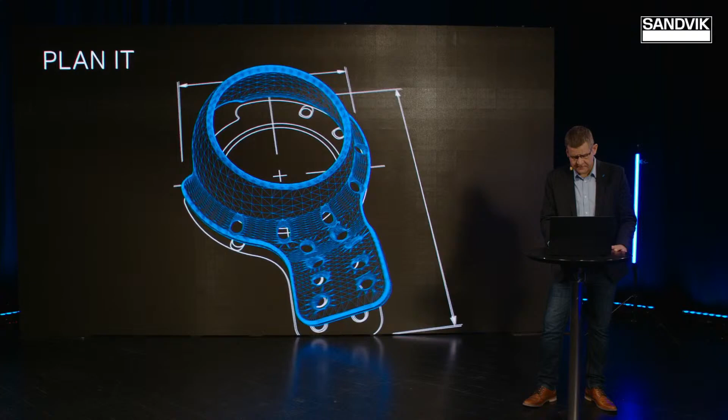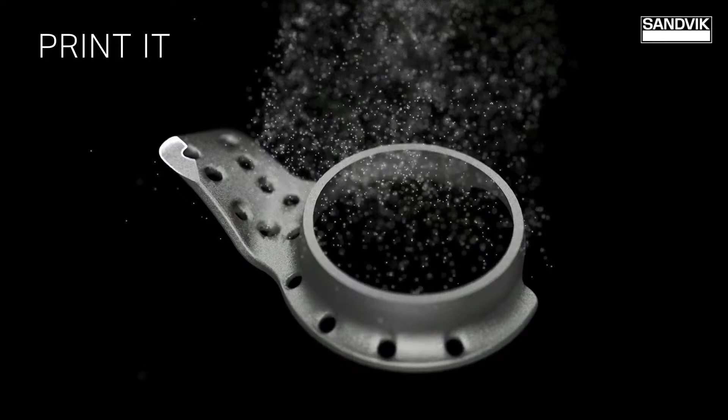And one of the things that distinguish Sandvik is that we have the whole titanium production under one roof, from producing the bars for making the electrodes, atomizing the metal powders, the additive manufacturing, and the post-processing. This ensures a unique traceability of the Sandvik titanium material used in the manufacturing process. We have also invested in different metal additive manufacturing processes, such as powder bed fusion, both laser and electron beam, binder jetting, and stereolithography, to fully understand the different possibilities with these additive technologies.

Titanium and additive manufacturing is a perfect match. The biocompatibility of titanium and the well-defined additive processes for the material make it possible to produce complex, tailor-made components for customized medical applications.

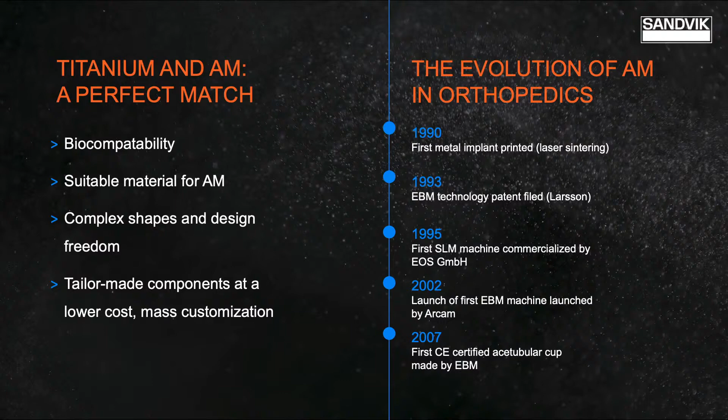The trends in implant material go back to the first use of bamboo pegs for dental implants in ancient China, to the first metal used by the Egyptians for dental implants, to more modern times when various noble metals were tried with limited success. The great breakthrough came in the 1950s, when titanium was first tried as an implant material. Good bone ingrowth was observed, and titanium alloys have been the first choice of materials for implants and medical devices thereafter.

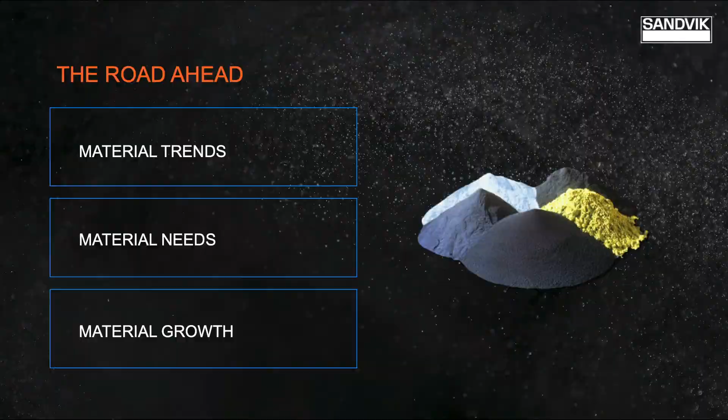The human population is growing older, and we are being more active for a longer part of our life. This leads to an increased demand for more implants. It is estimated that 30 million people currently are in need of implant replacement. It is estimated that here in Sweden, we perform approximately 25,000 hip replacements annually, and that is on a population of 10 million people.

In the US, more than 1 million replacements were done in 2017, and it's believed that this figure will increase to approximately 4 million replacements in 2030. So how can Sandvik contribute to this increased demand? Let us update you on where we are right now.

That is a good idea, Michael. Let's actually start by diving straight into our first segment, which is going to be on more material focus and production capabilities. And guiding us through this, we have you, Peter, who is also the research leader and technical sales professional here at Sandvik Additive Manufacturing. And then I would also like to welcome up on the screen, joining in from Neath, UK, Dr. Paul Davies. You are the Technical Solutions Manager here with us.

Nice to see you, Paul. Nice to see you all. Thank you. And hello, Paul. Nice to see you too.

And actually, before we started, we got a question from a viewer, and I'd like to fit in this one because I think it can fit into our presentation quite well. The viewer wondered about the typical metal powder properties and where we produce our powder. Is that something that you can answer? Certainly, Peter. Thank you. Well, the key parameters, I would say, for metal powders include, of course, the chemical composition, the powder size distribution, and the shape or the morphology of the powder, which all combine to influence the flow characteristics of the powder, which are very important for additive manufacturing processes.

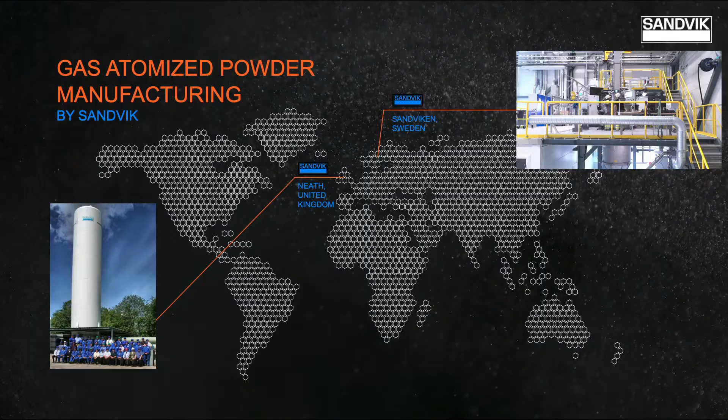So Peter, how does this compare to the production in Sweden? Yeah, well, thank you for the question. When it comes to Sweden, we have 2 atomization towers. One is for nickel-based and iron-based alloys. It's the VIGA, we call it. It's a vacuum induction gas atomization. And then we have the EIGA process, that is the electrode inert gas atomization process that we use. It is sometimes difficult to keep the abbreviations and understand them, but we use VIGA and EIGA. We can for sure produce powders with the largest powder particle size of 250 micrometers, and then we go down in size.

Paul, I was thinking, how long have we been making the powder, and how many grades are we doing today? Sandvik actually has a very long history of manufacturing metal powders, more than 40 years, producing powders since 1979. And we have a very large database of metals, more than 2,000 in fact, covering probably the widest range of alloy powders on the market, including stainless steels, which are used in metal injection molding, for example, cobalt chrome alloys, which are used in additive manufacturing for the production of crown restorations and bridges, as well as orthodontic brackets produced by metal injection molding, and many other types and classifications of alloy. How does this compare to production in Sweden, Peter?

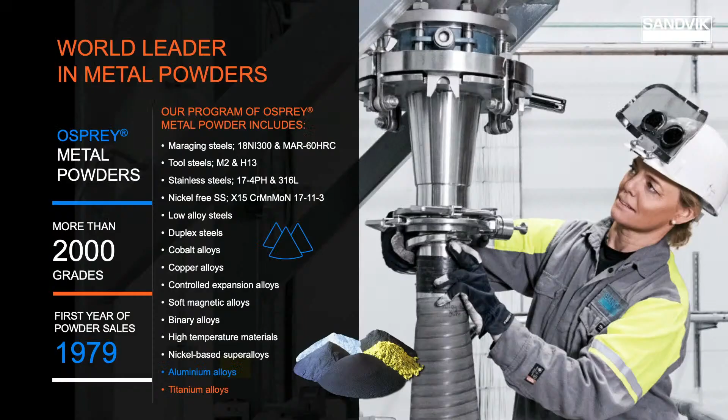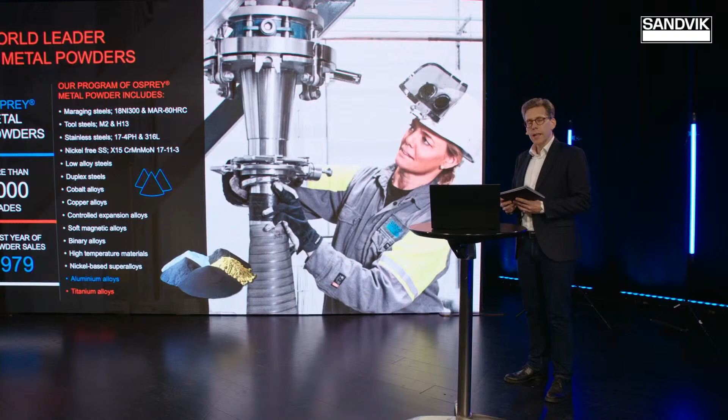Yeah, well, in the VIGA plant that we have, we do nickel-based superalloys mainly, but also some really complicated iron-based steels, where it's of high interest to have a clean product, as clean as possible. And then in the EIGA plant that we inaugurated last year, we atomize titanium 6 aluminium 4 vanadium as a start. We do 2 different grades.

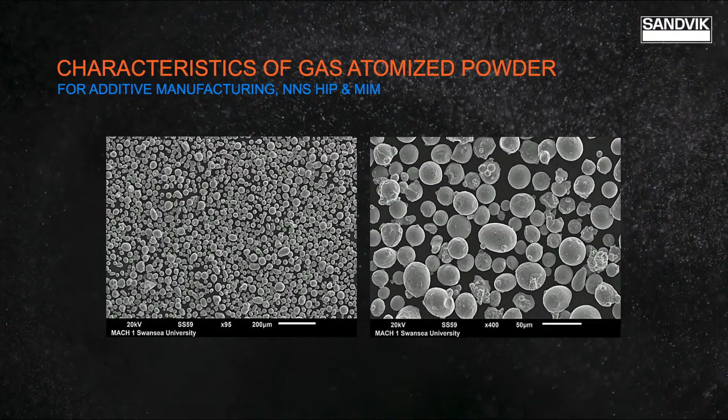When it comes to the powder then, I talked a little bit about the general alloys that we do, but when it comes to powder characteristics, what about them, Paul? How do you characterize them? Well, characterization of the powders is very important, from the shape of the powders, where we can see the examples on the micrographs, and the spherical shape typically produced by the gas atomized powder process. So they're spherical but not perfect, but they also involve a melting process, which is inherently clean, melted under inert gas, and typically has low oxygen levels and low levels of impurities. High tap density, so you can pack the powder in the powder bed, and with refined microstructures, and this leads to enhanced properties in the product.

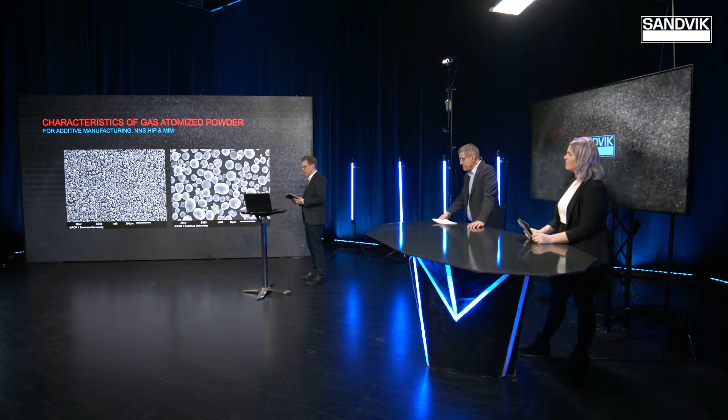And you speak about enhanced microstructures, but what about the size? Does that matter when it comes to which process it's used in? Absolutely. The size is tailored to the different manufacturing processes, in fact. Additive manufacturing has a number of different technologies, from direct energy deposition, where powders are provided from 150 microns to 53 microns, the powder bed fusion processes of electron beam and laser beam, using mid-size fractions, classic sizes of 53 to 15 microns. And then you have new emerging additive manufacturing processes like binder jet, and fine powder technologies like metal injection molding, and even the superfine powders less than 15 microns of micro injection molding.

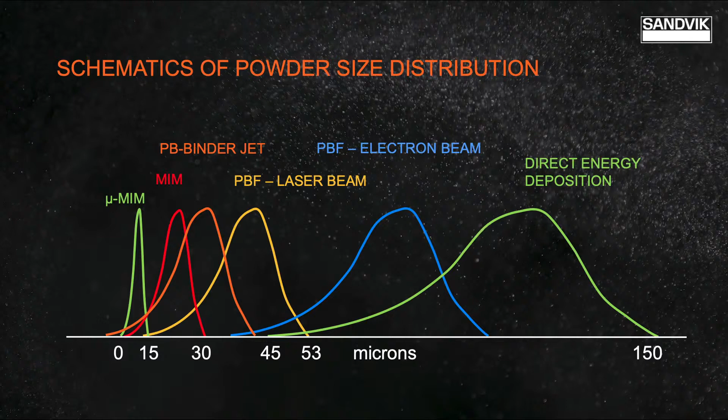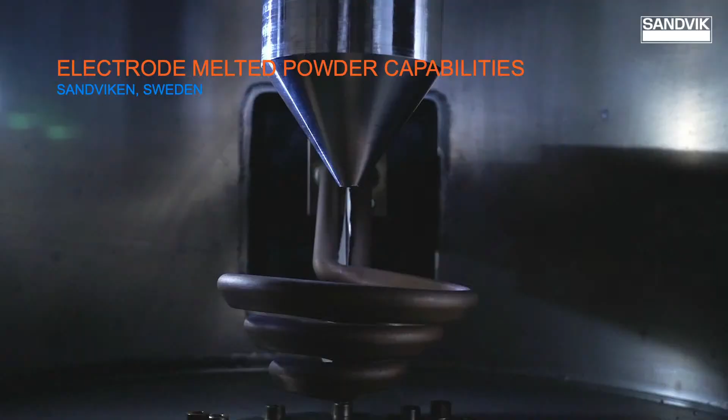So Peter, perhaps you could tell us about the titanium powder production process in Sweden. For sure, I can do it. This is a movie about it that shows that we use an electrode that we put down into an induction coil, that is conical at the end.

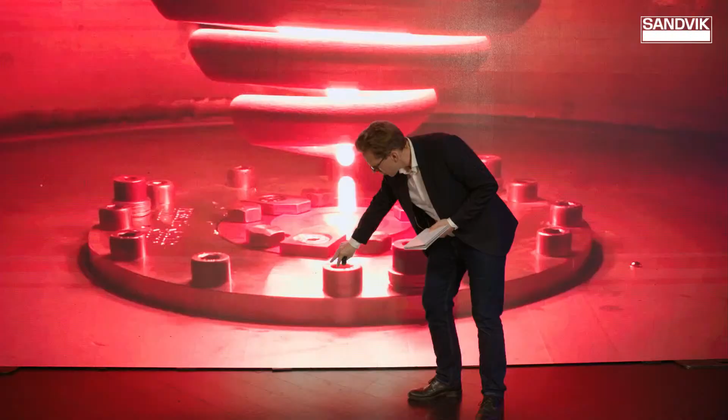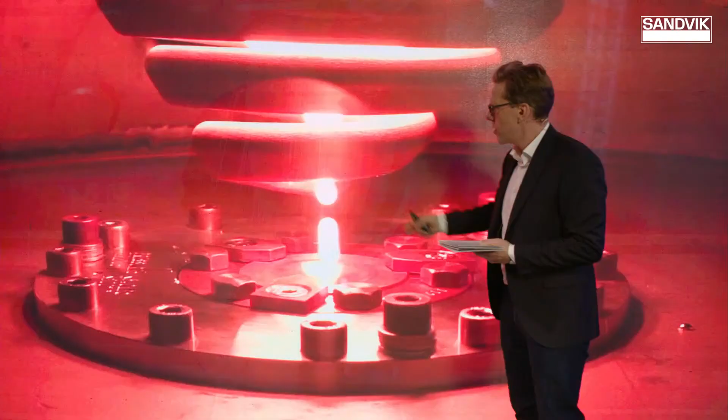So we heat this part up and it starts to melt, and as you can see, droplets start to fall, and then a small melt stream is created, and a lot of things happen inside, and you get curious, what is this? And schematically said, when the droplets go down, it's more like a stream that is then disintegrated into small droplets by gas, and these droplets are then cooled into particles, and they are solidified and go down into a beaker here in the cyclone.

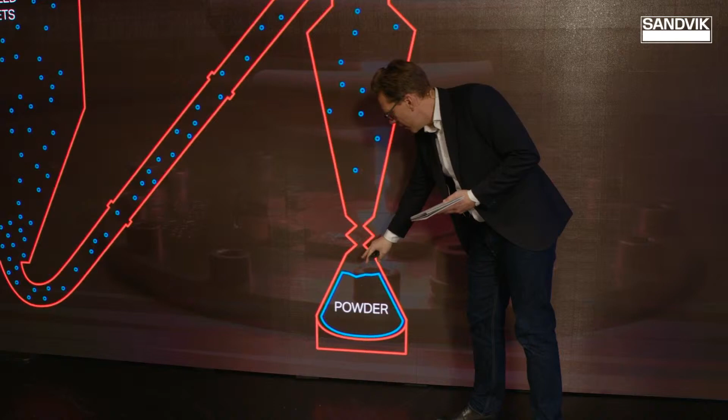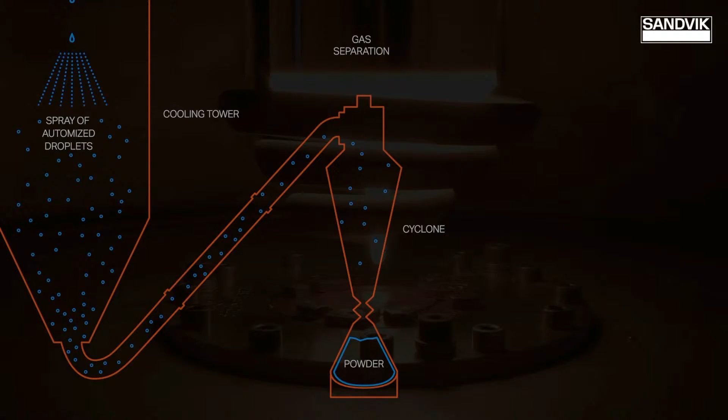This beaker then collects all the powder particles that we want to have, so to say, and then we move it over to a sizing facility where we size the powder into the exact powder particle size distribution that our customer desires, or the process that they use really needs. And related to that, we also have a packing station that is under inert gas condition, and also the entire production line, including the sizing, has inert gas to protect the titanium from any oxygen pickup or cross-contamination. We don't want that.

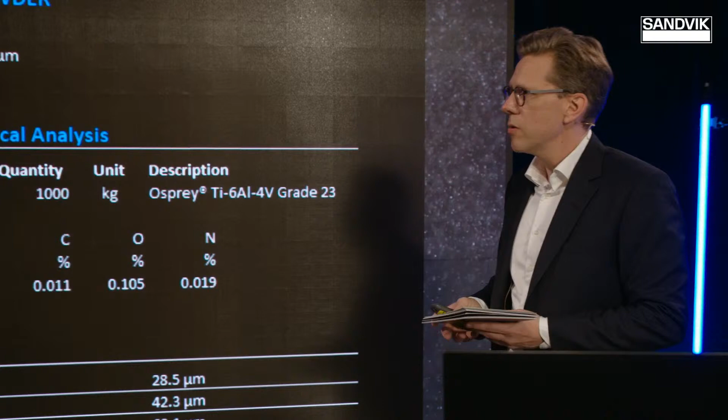I should say also, two typical grades that we use today are grade 5 and grade 23 titanium 6 aluminium 4. Grade 5 is somewhat higher in oxygen and has a higher strength, but grade 23 is really pure, and it's fantastic for medical applications.

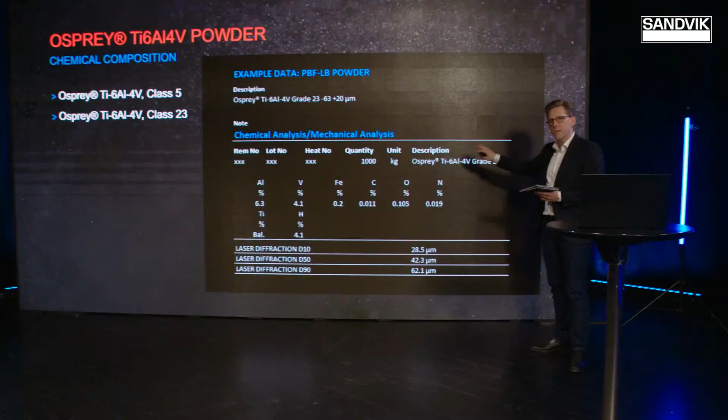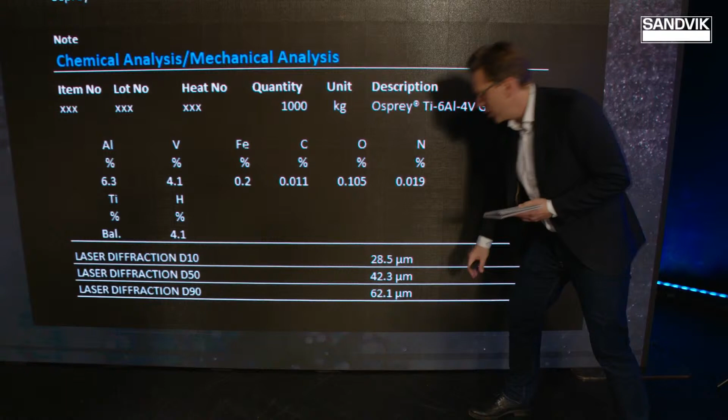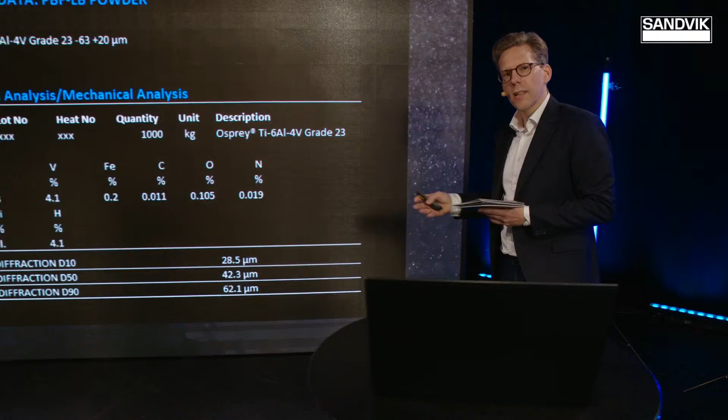Down here to the right, I should say this is a typical certificate that our customers get. And just to show how precise we are with the powder particle size, this is the mean size, 42.3 for this powder lot that has been sent to a customer. These are the small sizes that we are working with. One can imagine that it is a challenge to get the right powder to the right customer, but we do it in a good way.

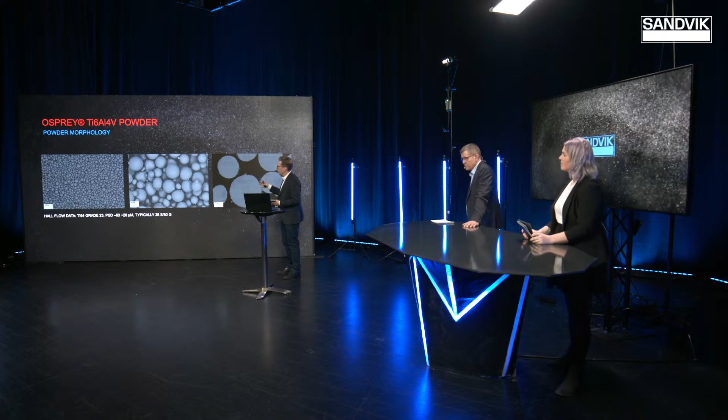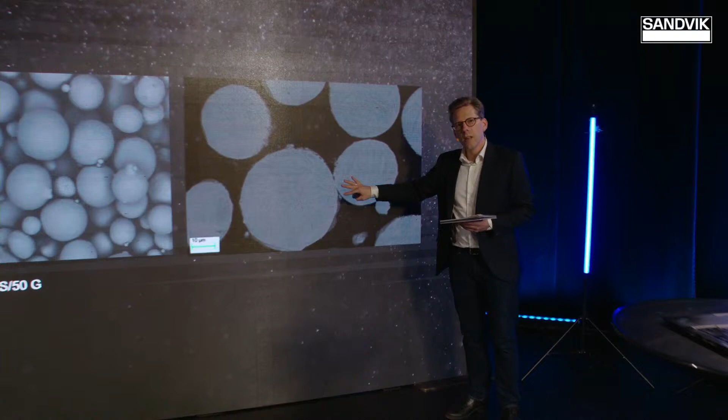Peter, what does the powder look like? Yes, and here you see typical micrographs of the powders. So one can say it's quite spherical, it flows quite well, and it is a good mix of the particle sizes that we want, in this case between 63 and 20 microns. As you can see to the right here is a cross-section of a powder particle that shows that it's fully alloyed. So it's the same alloy composition all through the powder particle.

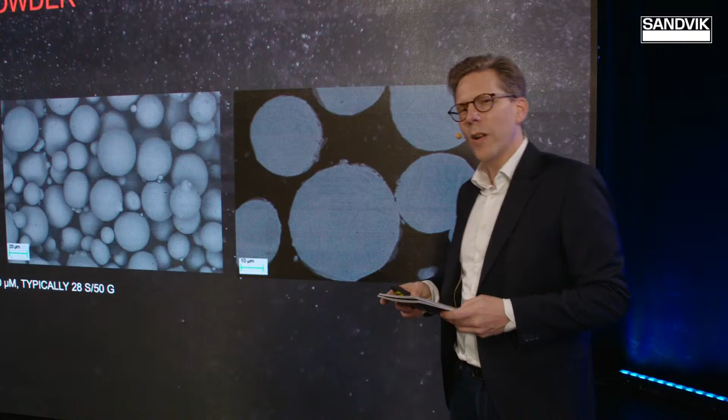And a typical measure that I mentioned is flowability. Typically we pour the powder into a small funnel and measure the time it takes to go through. And for this powder, it takes slightly below 30 seconds, more precisely 28 seconds for 50 grams to pass this small funnel. So we are very proud of this product that is relatively new for us.

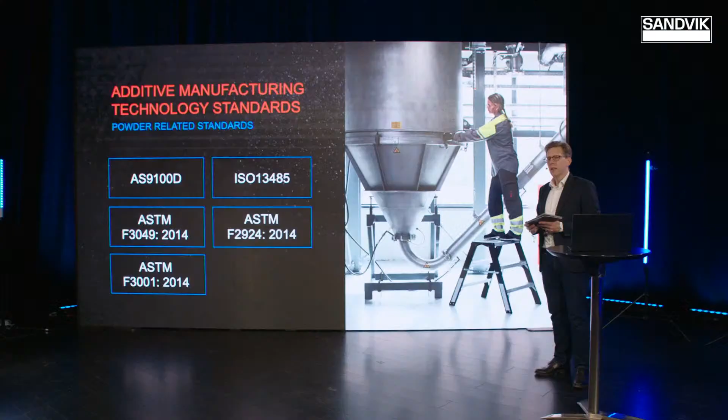And does the titanium alloy powder conform to international standards? Yes, it does. And actually today it is a somewhat new field. There are standards. As mentioned earlier, we have certificates. It's the AS 9100D, as you can see, and also the ISO 13485. The first one is for aerospace and the second one is for medtech industries. And this ensures our way of working is a good way to deliver a high quality product with good traceability to our customers all over the world.

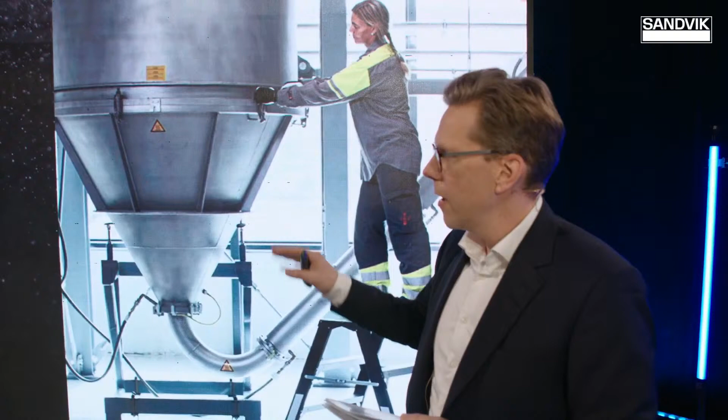But looking a little bit more specifically into standardization, we also have the ASTM F3049 that is for powders for additive manufacturing, all the various processes that are used. And then we have the ASTM F2924 and F3001. And these are for the Ti-6-4 grade 5 and 23 respectively.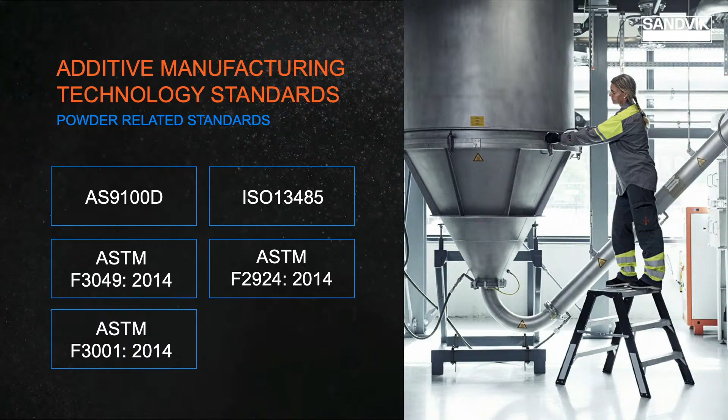Thank you so much, Peter, and thank you, Paul, for that rundown. If we have you back at your computer, Peter, I think we promised you an interactive session, so I think it's time for another question. Yes, sure. Let's see. We have one question here from a viewer.

He asked about additive manufacturing: despite some key advantages, there is so much hype about the AM processes. And to achieve process economy in the AM industries, what do we need to do further, the viewer wonders?

Well, I would say that is actually quite a perfect question for me to announce our next segment, which is focusing a little bit more on the additive manufacturing processes. So to answer that, I would like to welcome another two of our colleagues here from Sandvik Additive Manufacturing, Dr. Harald Kissel, who's the R&D manager, and Dr. Leandro Feitosa, who is an R&D engineer in powder technology.

Welcome, both of you. I'm throwing you straight into the fire here. What do you have to say to this? Hello, everyone, and hello, Paulina. Thank you for that. Welcome also Harald, my colleague here.

And I think this question relates perfectly to the work that he has been doing right now. So, Harald, do you want to talk a bit about the process economy? Yes, sure. This is one of our main targets when qualifying a material for a certain AM process. However, this is not the first goal we are after. The first target is always to achieve the desired quality, which depends, of course, a bit on the industry segment we are working for. Once that's done, the quality is right, we focus on improving cost and lead time of the AM build by optimizing the set of print parameters that we have.

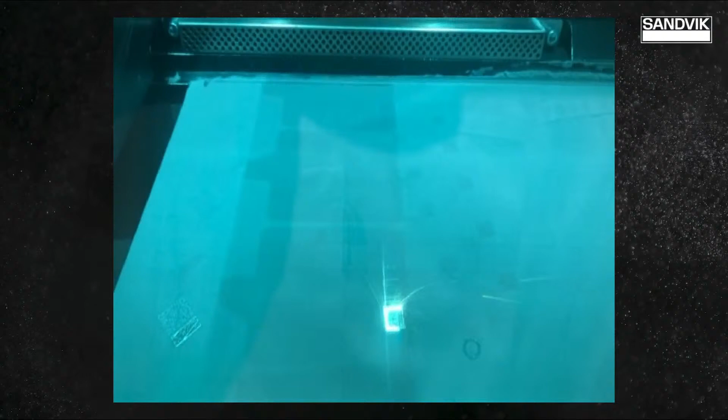And what we see in the video that we will be showing now is the print process for powder bed fusion laser. So that's the process that we focus on in our webinar today. And that's the process that we use intensively with titanium in our R&D and production. Oh, thank you for that, Harald. That's a very interesting video. But when you mention the parameter optimization, what do you mean by that exactly?

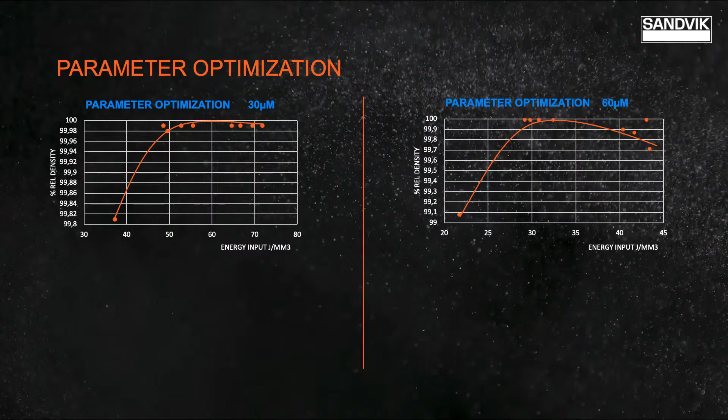Yeah, parameter optimization is an iterative process. We basically vary the energy density of the laser. That means the energy input into the powder during the print process, and then print test cubes in a design of experiment arrangement. Then we cut and polish the cubes and analyze them under a microscope to get the relative density and the feedback on the kind of defects.

And what you see on the diagram on the left shows a range of different input energies. Where the energy input is too low, you have low relative density, and there you see a lack of fusion. And where the energy input is just right, you get up to full density, and this is what you want to see.

All right. Well, so just to make sure that our viewers understand. So first we achieve the right quality, and that means microstructure, and then you increase the powder layer thickness. So that relates to the build-up speed. Is that correct? Yes, exactly. And of course, we do spot checks, doing tensile tests all along the way to get an outlook on the mechanical properties that we achieve.

The diagram, when we go back to the presentation, the diagram on the right-hand side shows again this sweet spot in the middle section where the material gets very close to full density. You see also a third region to the right-hand side where the density again gets lower. And this is where you get an over-melting of the powder and then you receive gas pores. And that's also undesired. And all these three regions can be seen in the 60 micrometer parameter optimization that you see on the screen.

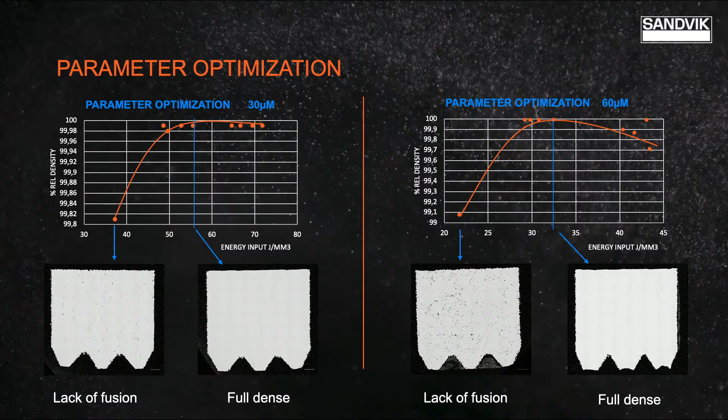Then I should add that 60 micrometer is of course not the end of the story. We are working on pushing this envelope further and further to drive cost out of the process. The trick really is to produce and tailor a powder that spreads very well and can be melted to high quality, even when optimizing for cost. I must say that sounds very appealing. Anything else you want to add in the optimization run?

Yes, of course. There's a bunch of other parameters in a laser printer that you can adjust, and I could talk for hours about this. We adjust contour parameters to improve the surface roughness. We determine maximum inclination angle. We optimize parameters for support. We build a lot of statistics to be compliant with our internal quality standards and to prove process robustness.

Up till now, we have reviewed titanium on 5 different platforms from 3 different machine vendors in-house. Working with the Swiss M4M Center project we will talk later about, we will add 3 more machine vendors to this know-how. In some cases, we even do the material qualification in collaboration with a machine vendor. So just imagine the competence that you can build up when you process different titanium powders on a variety of laser printer systems and analyze this all in one place.

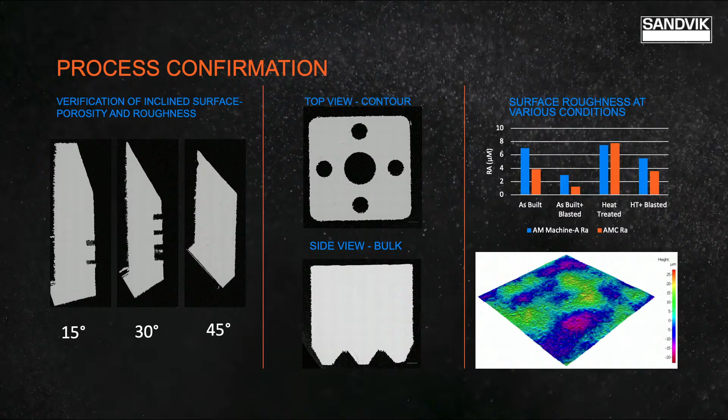Now I've talked a lot, Leandro. Let me turn this to you. I just said analyze this all in one place. So how do we analyze the material properties in this iterative process? And tell me, how does that material data compare?

Well, Harald, you're very right. That competence would be very valuable for us. And the process of comparison of material data starts with the microstructure. So as you can see on the screen, differences in microstructures after printing will usually indicate to us whether we have a stable process or not. And from there, we can take further actions to mitigate these observations.

Other improvements can be done, such as stress relief treatments or hot isostatic pressing. And this is when you have more defects, such as porosity. So Harald, to be able to provide our customers and partners with the best set of data, we must go to these 2 analyses. Okay, I understand now, but what can we tell about our microstructure when we compare it with other atomization methods out there?

Wow, that is an important question. And as you can see on the slide, I placed on the top the microstructure that was obtained for the print done with the Osprey titanium powder, obtained after stress relief and also the HIP. And besides some slight coarsening of the phases, these microstructures are very well in line with what we expect for this alloy. And when we consider even other methods like plasma atomization, we can see that there's very small difference between them.

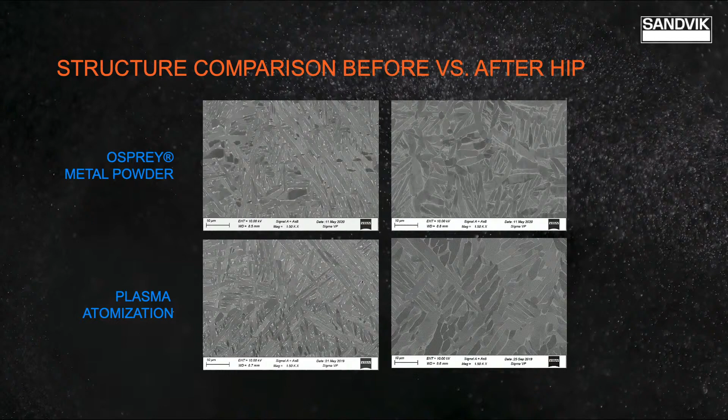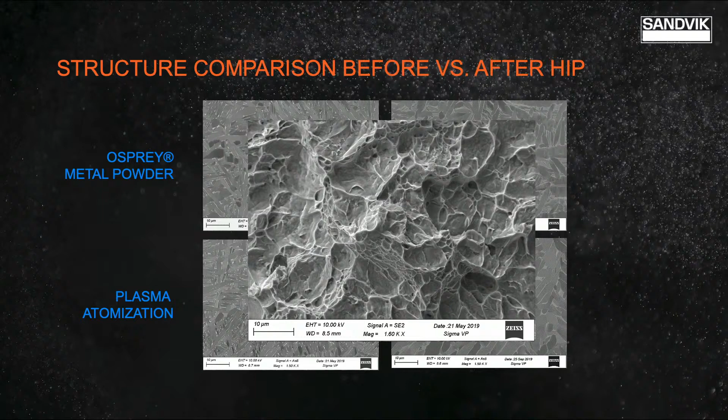The next image even shows us a fracture surface for an impact toughness test that we did. And we can see overall that we have a very ductile surface that indicates a very good plasticity of our material. So it appears, after all, that the Osprey titanium powder shows very good characteristics. What about the mechanical properties? Are they also good? Yeah, that's a fair question, Harald. And most of the viewers will want to know this.

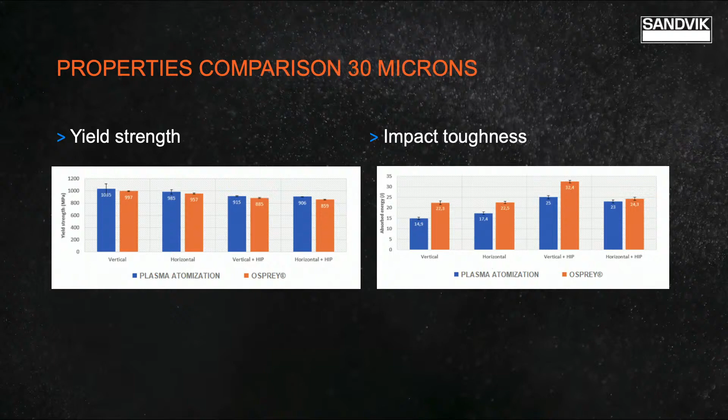So when we print using a 30 micron layer thickness, we see very good mechanical properties. We can even achieve tensile and impact toughness properties that are at least comparable to the plasma atomized powders, as you can see on the screen, especially when you take into account the error margin. So we achieve this by a very good control of the oxygen content and the process parameters, like you mentioned just now. That's very reassuring to hear.

And now I wonder if this trend will be repeated if our customers want to speed up their processing time and print using, for example, 60 micrometer layer thickness. Can you show us something about this? Yeah, absolutely. We see one example of that in the next slide: when we compare a 30 micron layer to a 60 micron using the same machine, in this case the EOS M290, we can achieve properties that are just as good or even better for the 60 micron, as you can see in both images that I'm showing.

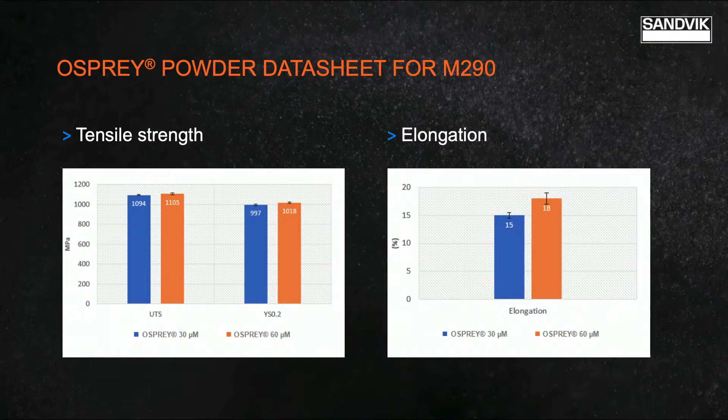And these are key tensile properties that most of our customers want, such as the yield strength and the elongation. So yeah, there you have it. It's a very important message. Well, thank you, Leandro, for sharing this information. I'm sure our audience will appreciate knowing where we stand with our titanium powder.

And with that, I will pass the word back to Paulina. Thank you very much. So thank you, Harald and Leandro. It wasn't Paulina, it was me.

So one great example of how this technology is applied hands-on today is a highly innovative company producing advanced prostheses for cranial reconstructive surgery. So without further ado, I would like to welcome Dr. Kajsa Björklund, Director Technical Operations at OssDsign, to tell us a bit more about their operations and mission, how they're putting titanium to good use in some of the most advanced medical implants to date. So welcome, Kajsa. Thank you so much, Mikael. Thank you for inviting me to this exciting webinar.

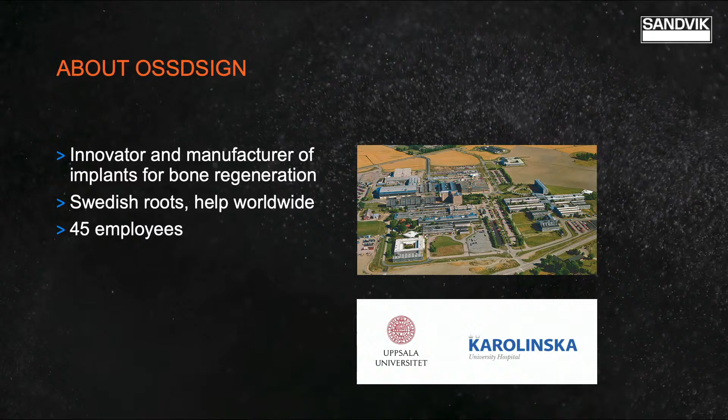So as a start, I would briefly like to go to the next slide, showing you what OssDsign is about. We're an innovator and manufacturer of implants for bone regeneration. We have our main office and production in Uppsala, so quite close to Sandviken. But even though we're based in Sweden, we help patients worldwide, mainly today the US, Europe, and soon also Japan. We have around 45 employees, where about 30 are placed in Uppsala.

So on the next slide, I would like to start with why titanium is so important for us and why it actually was, I would say, a game changer for OssDsign as a company and for our technology. So the technology that we have developed, which was a collaboration between Karolinska Hospital and the Uppsala University Ångström Laboratory, is a titanium reinforced calcium phosphate technology.

And actually the technology was not just, wow, this is a cool technology. It was actually developed to solve a real clinical problem that the plastic surgeon had when he met patients. With some of the conventional implants like pure titanium or plastic in contact, especially with soft tissue, you could, for instance, see a higher rate of infections. So by using this technology instead, you can lower the rate of infections and you will actually get a much

better bone ingrowth. But at the start, our technology was not based on 3D printed titanium. We used titanium in other shapes. For instance, we had laser cut sections, but that limited us regarding the size of the implant, but also the shapes and the geometry. So thanks to the great advancements in 3D printing titanium over maybe the last 10 years, going from prototype to production, we have, since 2014, used this in our products to make the custom-made implants.

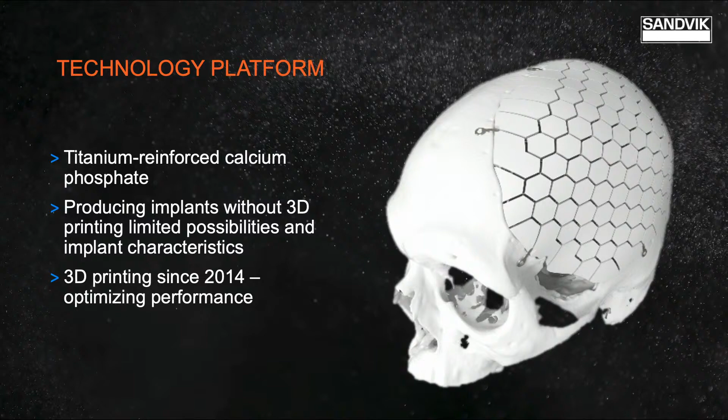And as you can see on the next page, the implant is made of two main components. We have the 3D printed titanium mesh that stands for the stability and the protection. And then we have our unique calcium phosphate formulation that we mold on top of the titanium mesh, which stands for a perfect aesthetic outcome, a perfect fit. And this combination generates outstanding healing properties, especially due to the chemical composition of the ceramic.

All these custom-made implants are based on the CT image we get from the surgeon of the patient's cranial defect. Then by using CAD, we can design the implant and all the components needed, and finally put them together to get this highly innovative implant.

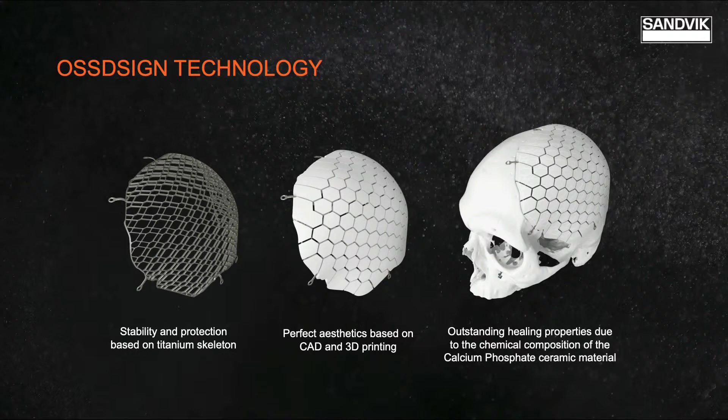So moving on, I would like to highlight what 3D printing has really enabled us to do. It enabled us to make these custom-made implants with the mechanical properties, combined with the bone regenerative ability, which no other competitor has in the field of cranioplasty. We have also been able to make a ready-to-go implant. You don't need any additional plates to fixate the implant. We already have the fixation arms as part of the titanium mesh, so the surgeon can just use ordinary surgical screws.

We have been able to do very extreme advanced geometries, and to help very complex patient cases thanks to this technology. For instance, we have a patient where we reconstructed 83% of the patient's whole skull due to a large tumor defect. And for these kinds of patients, when you have a tumor that you need to remove in the bone, we have also developed custom-made surgical tools, where we used titanium, but also plastic.

So not just thanks to 3D printing of titanium, but 3D printing as a whole technology, OssDsign has been able to provide surgeons and patients with the best custom-made implants and the best custom-made surgical tools, tailored to the patient's defect, to improve the patient's quality of life.

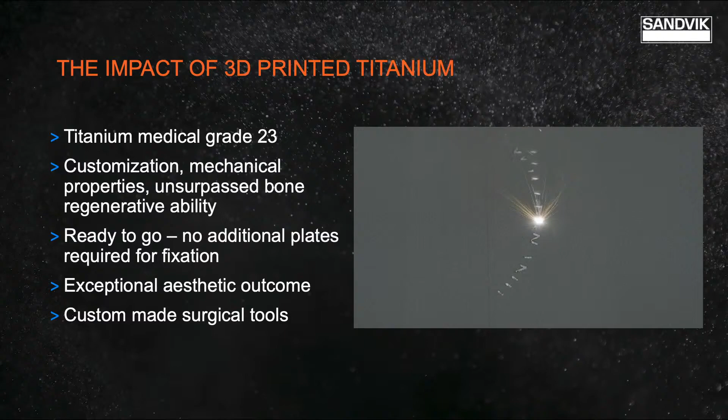So moving on, handing over to Mikael. Thank you. Thank you, Kajsa.

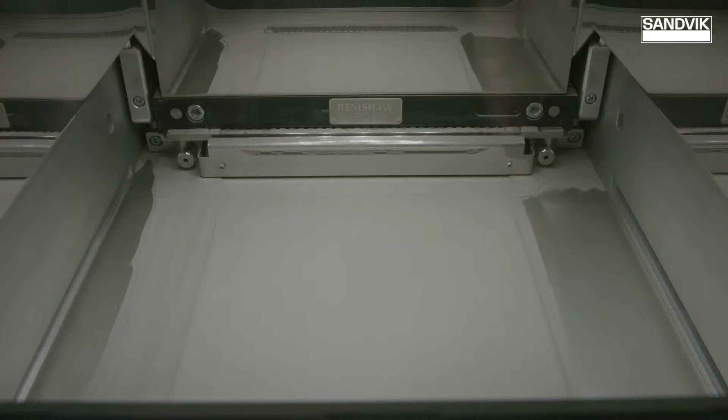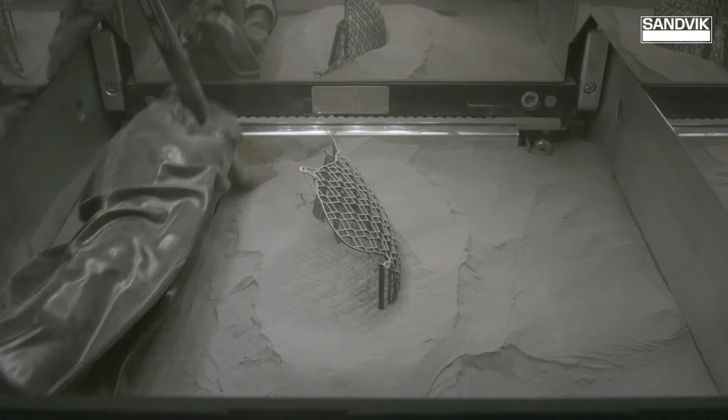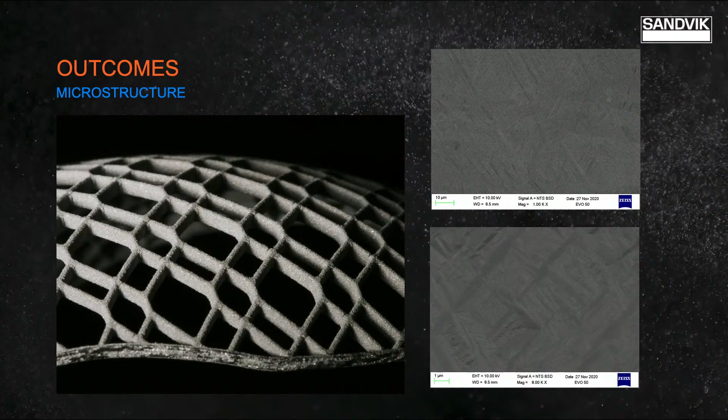We have a small movie here showing how we are printing the skeleton or the net for OssDsign, and afterwards we are depowdering this in our Renishaw 500Q machine. So you will see the net coming out of the powder bed, and the excess powder being removed. Even though the net structure or the skeleton is quite delicate, it is important that you obtain a fully dense structure to have the right mechanical properties, which can be seen in this micrograph of the printed titanium.

Thank you, Mikael, and thank you so much, Kajsa. I'd say it's becoming evident that one major aspect of optimizing additive manufacturing for the medtech industry is the cooperation and partnerships between a variety of organizations, right? Yes, that's definitely true.

And on that note, I would like to welcome our second guest to this session, Mr. Nicolas Bouduban. You are heading the Swiss M4M Center, working to adapt additive manufacturing specifically for medtech use. Welcome, Nicolas. Thank you, Paulina. Thank you for the invitation.

It's a great pleasure to walk you through, together with Harald today, a great initiative we are developing here in Switzerland. Our aim is to really push the technology transfer of additive manufacturing into the medtech market. It was recognized in the early days that we need a bridge to provide the great research an opportunity to target the market.

And as we can see next in the slide, this was impulsed from the Swiss government. That means that we provide a structure that is regulated under a research law. And we did apply for a project, an initiative that has to be supported from the industry, that has been non-profit, but also according to a private-public partnership, as we do a lot in Switzerland. It's a common way to merge the interest of the research and the industry.

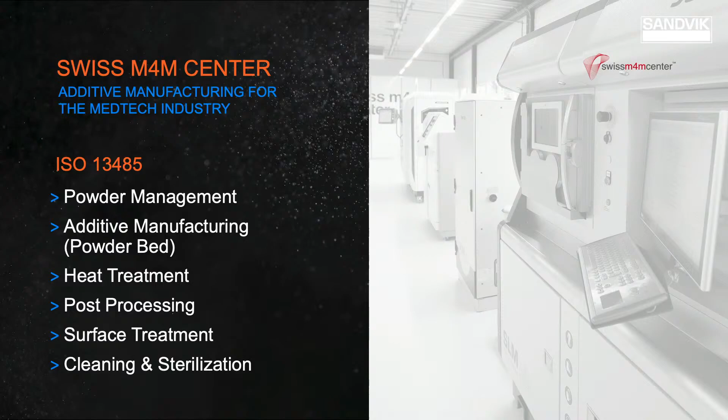And Harald, what can you provide as competence at Sandvik in order to promote powder management? Yeah, when it comes to powder management, there are actually a few projects where we can learn from each other and improve, as our facilities are running under the same qualification. So now within this project, we look together at degradation of titanium powder, the effects of degradation on the powder and on the part quality. Then powder recycling is another big topic we are working on to support sustainability and cost effectiveness of the process. And then we are working on solutions for effective powder handling and storage as well.

Moving on to our next topic, Nicolas, that we wanted to raise in this talk. It's about digitalization. It's a buzzword that is nowadays very often used. And what I learned is that the Swiss M4M Center is also working on digitalization. Can you describe what that means for you and how additive manufacturing fits together with this?

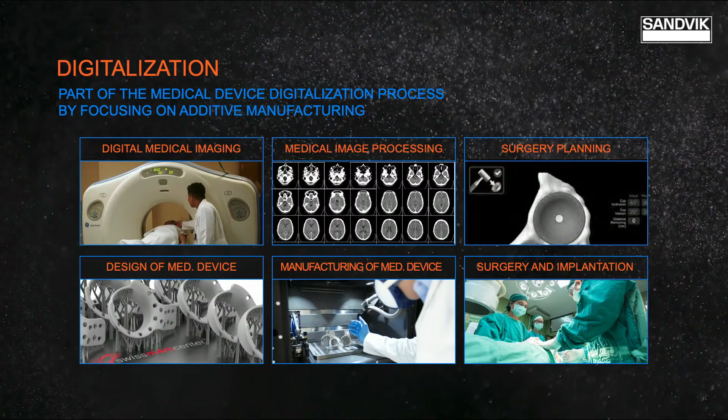Absolutely, Harald. I think you are right. It's a buzzword. Everyone knows that digitalization can mean everything, but at the end, it's at the core of our activities. If you want to push additive manufacturing in the medtech market, you need to address this chain. This chain starts with the patient. I mean, you need to take patient data, be able to compile them in a way that you can plan a surgical tool, you can plan a surgical treatment and also an implant.

This implant has to be then manufactured in a certain way. And what is the best manner to address custom-made devices, as we saw before in the talk? In the digital way. That's what we do here. After a great planning and a great design, we print the implants and try to support the surgery with our know-how towards a successful patient treatment.

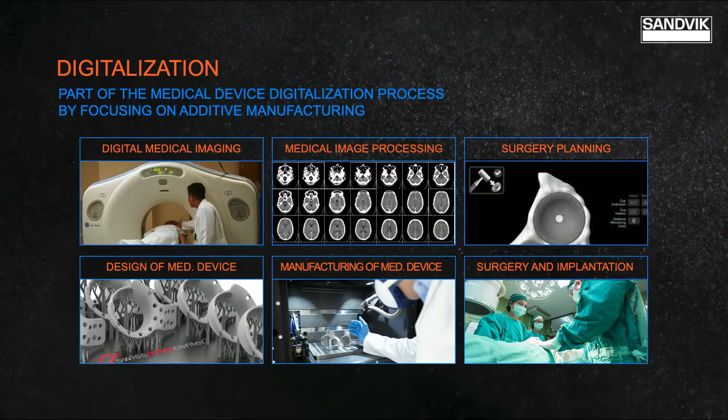So basically, if we can summarize our activities, the M4M Center has an aim to develop a production chain. This production chain should be able to be operated to offer a way for our customers to use additive manufacturing in order to prove the technology. When it is done, we have a big interest to transfer this know-how back to the industry. The primary goal is to see many companies around us using additive manufacturing and provide solutions for the medtech industry, in order to provide value.

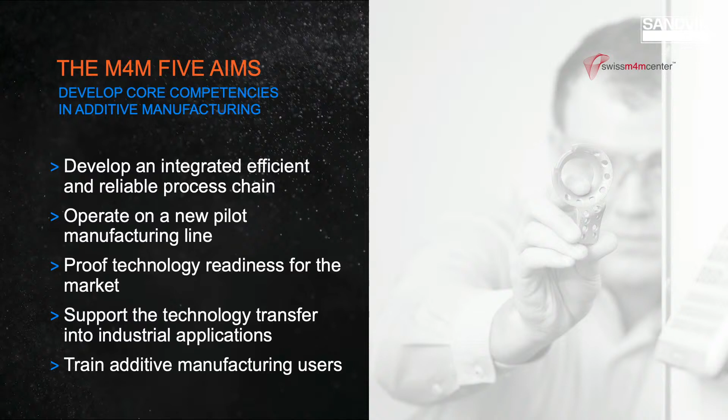To do that, of course, it's a big work, and we need partners. We build up an ecosystem, as said before, of partners, specialists that are able to support us in different topics, from powder to clean medical devices. And I think this is a uniqueness of this concept here: it's not just one company, but a company with a great backpack, with a lot of know-how, a lot of competence, and also interest in providing value. Harald, maybe from your point of view, what is the value, what is the gain to be part of such an ecosystem?

We are a powder producer, and as a powder producer, we are sitting right at the beginning of the value and the production chain. We are really looking forward to embed our powder production in this ecosystem to see how it fits and to get feedback from all the subsequent production processes, all along up to feedback from hospitals and surgery and from the lifetime of an implant in a patient. And our goal really is to tailor the powder and to optimize the process for the requirements of medical applications. How does that sound to you, Nicolas?